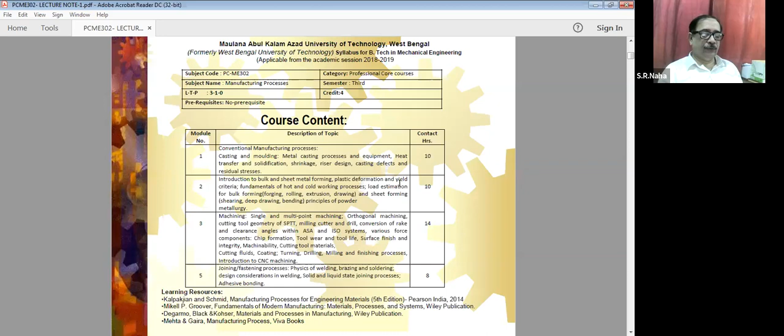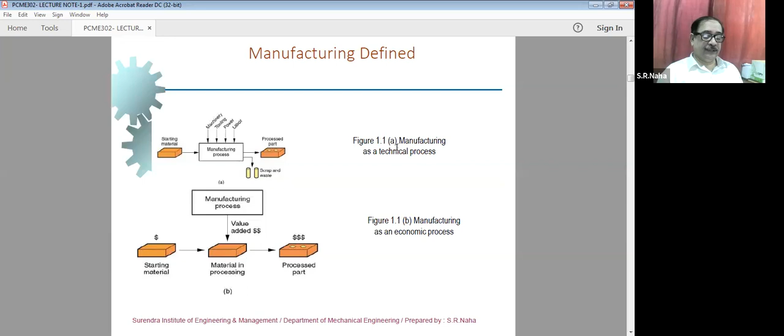So I tried to define the different manufacturing in yesterday's class. We did up to here, and we have seen how technologically as well as economically the manufacturing can be defined.

This manufacturing is very important to our lives, because it caters for our different needs to live, for day-to-day life as well as daily need. It caters for that only.

So to manufacture something, where do you manufacture? We manufacture the thing in industries. Now there are different types of industries. When we talk about manufacturing industries, these are divided into three categories: primary, secondary, and tertiary.

Now we'll try to understand what are these: what is primary manufacturing, what is secondary manufacturing, and what is tertiary manufacturing industries. To start with, the primary industries are those that cultivate or exploit natural resources.

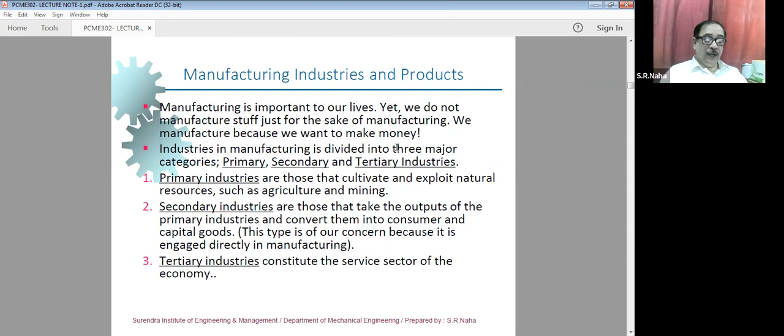Then the tertiary industries, it constitutes the service sector of the economy. So you can see here primary, secondary, and tertiary. Now secondary is dependent on primary industries, and the tertiary industries depend on secondary industries.

And what are these manufactured products? These are the final products by industries like aerospace, maybe automotive, maybe basic metals, maybe computer, electronics, glass, ceramics.

And these manufactured goods are divided into two major classes. Manufactured product is divided into two major classes: number one is consumer good, and the second one is capital good.

Consumer goods are the products purchased directly by consumers, such as cars, PCs, TVs, etc. These are the consumer goods.

And the capital, what is capital good? Product purchased by other companies to produce goods and supply services. So these are capital goods - products purchased by some other companies, and then they produce goods and supply services.

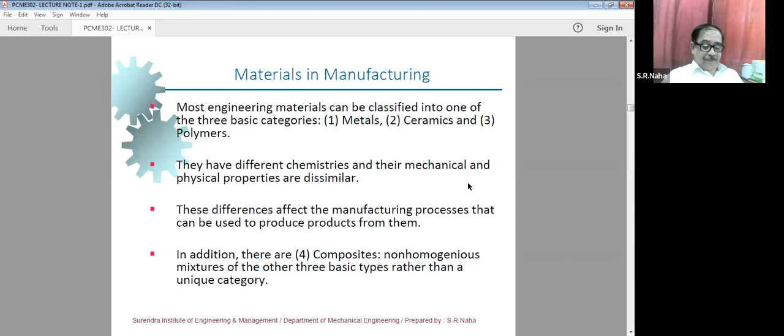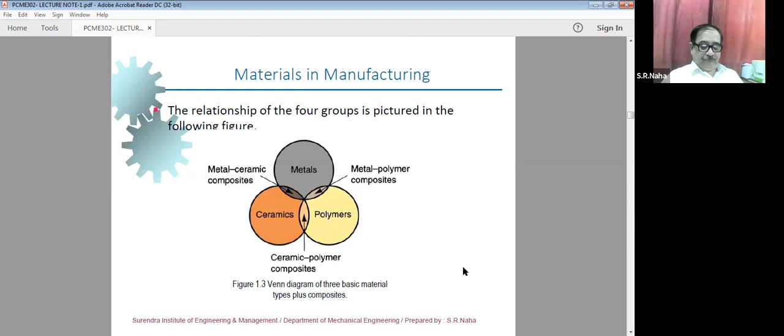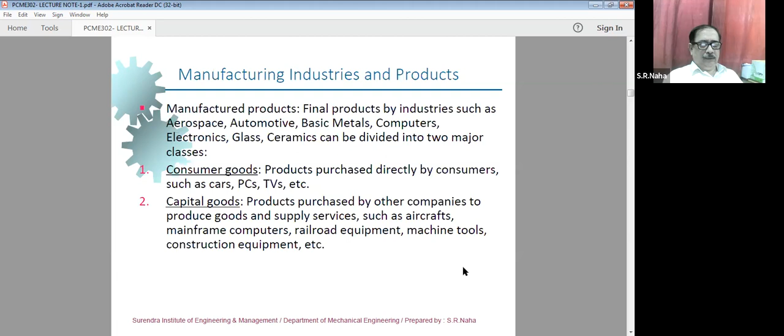Manufacturing consists of three main blocks. First is material, second is processes, and third is system. We have discussed the material in brief. Next we will discuss the processes, because once you have the material, what is required is the process.

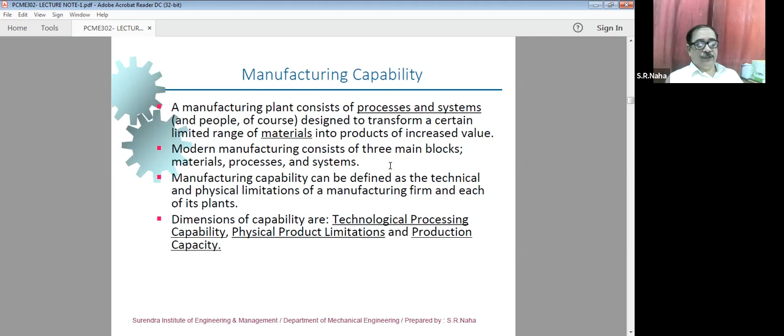So this manufacturing process can be divided into two basic types: number one is processing operations, and the second is assembly operations. In processing operations, the work material or raw material is transformed from one stage of completion to a more advanced stage closer to the final desired product.

Say your product is a product called A, and for that purpose you have chosen a material B. Now in the processing operation, you will try to make item A from item B. To make it, you need some processes. For example, say you have an iron rod.

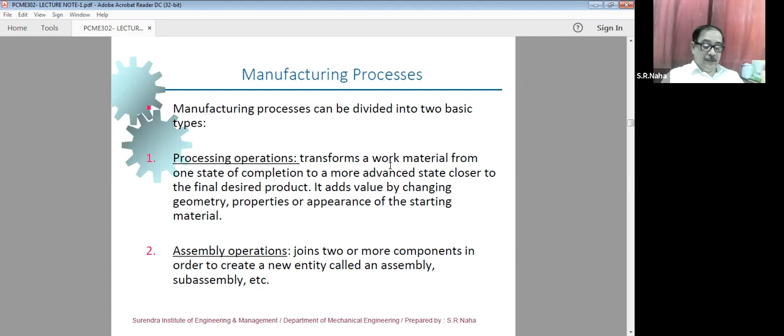Again, processing operation uses energy to alter a work part's shape, physical property, or appearance in order to add value to the material. So in processing operations, you require energy to change the shape, physical properties, and appearance of the raw material, and in the process, you are adding value to it.

So here, three categories of processing operations you can consider. Number one is shaping operation, second one is property enhancing operation, and third one is surface processing operation. Shaping operation gives the desired shape to the material. Property enhancing operation tries to increase the physical properties.

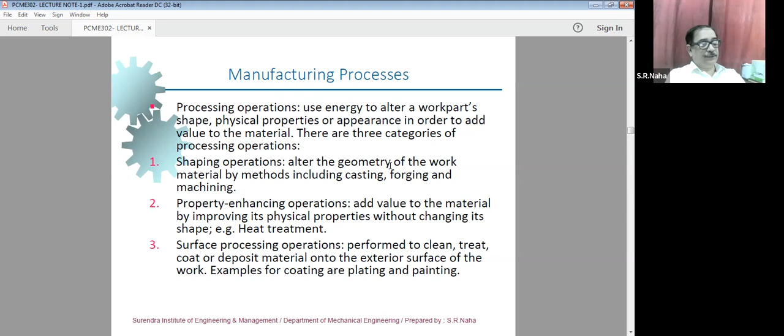Now a little bit more about this. Shaping process - what do we do here? We change the geometry of the work material, either by application of heat, mechanical force, or a combination of both.

Again, we can classify this shaping process into four categories. First one is solidification process.

What is the solidification process? The starting material is heated to a liquid or semi-fluid state, and then it is cooled and solidified to form the part. What do we do here in solidification process? We heat the material to its liquid or semi-fluid state, and then allow it to cool down and solidify to form a product. This is solidification process.

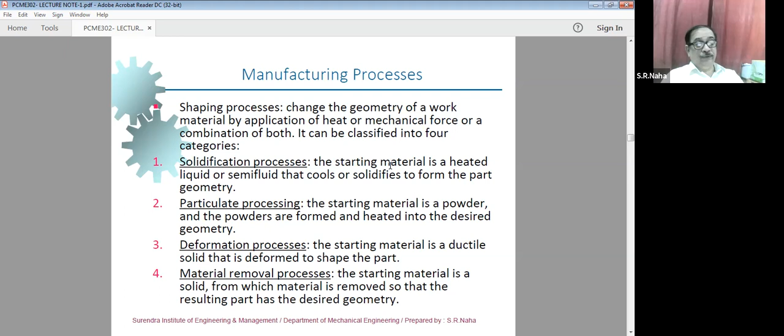Then material removal process - here the desired shape is obtained by removing material from the original or raw material, just as I mentioned about making a shaft of 30 millimeter diameter from an MS bar of 40. So these are different types of processes by which you can give shape to a given material.

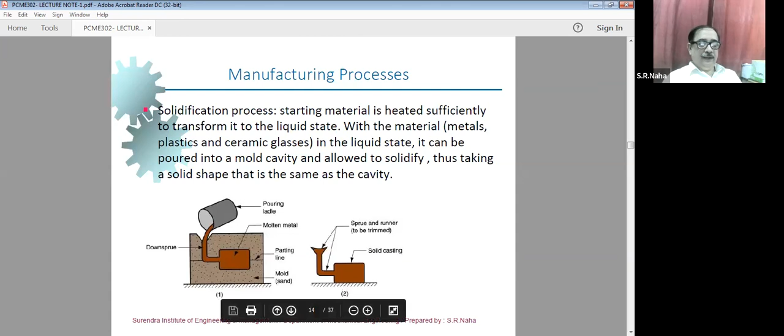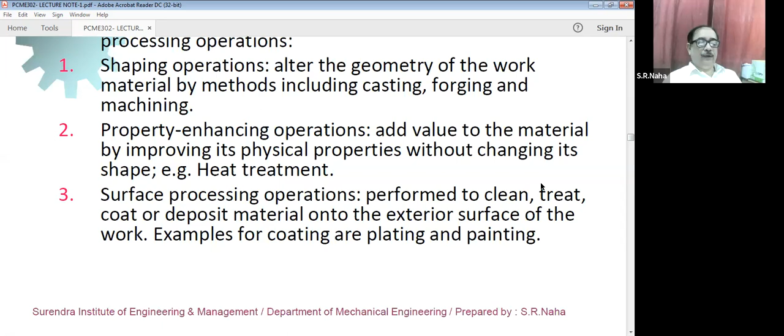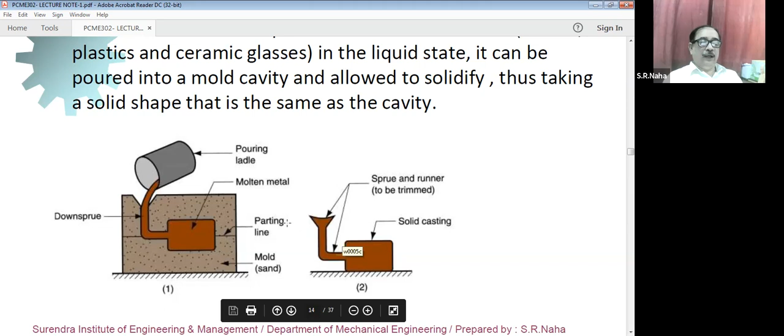So solidification process, as I told you, is somewhat like this. Let me show you what that is. We'll discuss this in detail, just showing you now. You see, a mold is there, a sand mold is there, and there is a cavity here, and molten metal is heated to a molten state and poured here to fill this cavity. Then when it solidifies, you break the sand and you get this piece. So this is what we call solidification process.

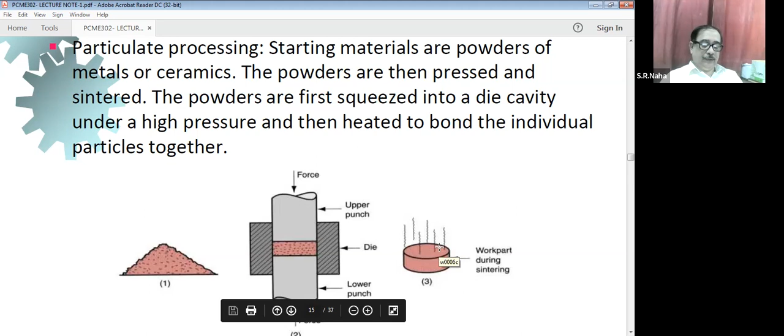And the particulate process - you have a powder here, and this powder is given a particular shape. You apply force from both sides and compress it, and then it forms a part like that. There are different processes in between, but basically this powder, after applying force and maybe a little bit of heat, we get this particular component from the powder.

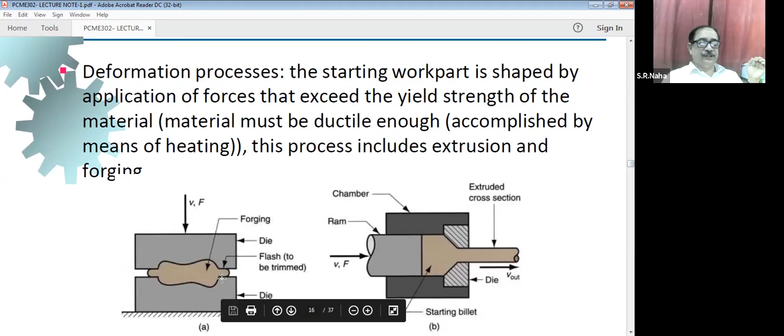And the deformation process, again - a material is there, a die and punch in between, so it takes the shape of the die and punch. Here you have the material and the ram, so you apply force, and through this aperture the material is extruded, just like a toothpaste. So this is the material being deformed.

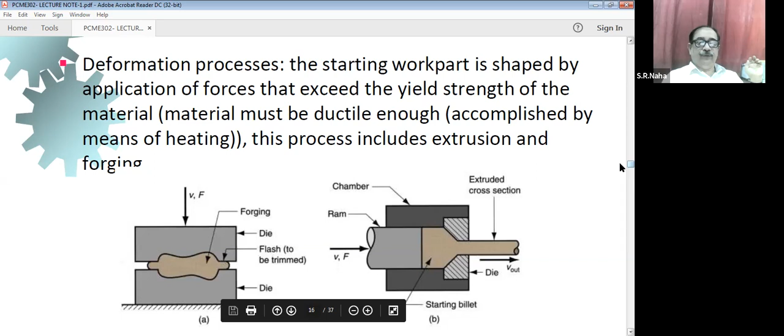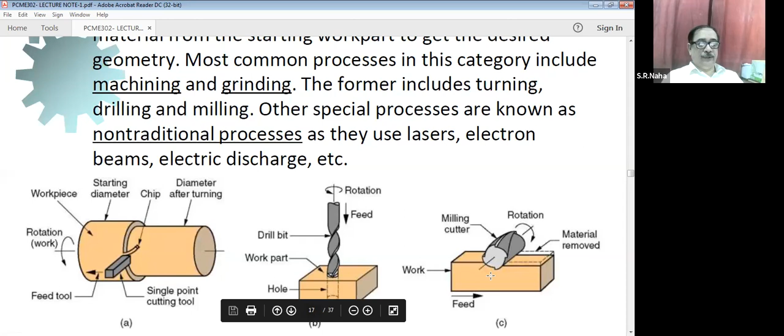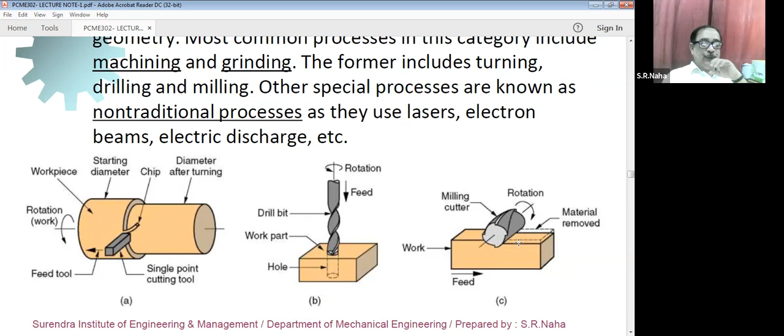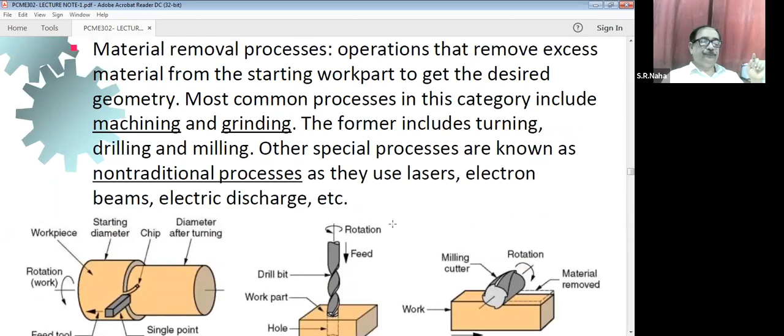And the last one was material removal process. So very simple - this was the total work, the raw material, and then we have removed material. You can use a lathe for this. Also, when we drill a hole into a work part, material is removed with the help of this tool, and there are certain other drilling patterns also. So this is what is material removal. So these are the four basic types of shaping processes.